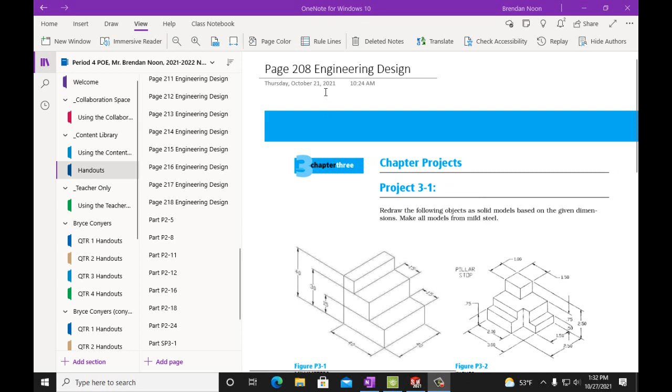All right, today we will be starting the projects in Chapter 3, page 208 of our Engineering Design and Graphics with SolidWorks 2016 workbook. There are 4 parts that we're going to be creating, and you could see that there's multiple ways that you could do these parts. All right, so figure

3-1, project 3-1, you could just draw this profile and just extrude it out 40 millimeters and be done with it. Or you can draw a square 40 by 40 and extrude it up 15 millimeters and then draw on that top plane. You could draw on the top surface plane, you can draw a 40 by 15 and have that extruded up, and then you could do 40 by 10 and extrude that up 10 millimeters.

So these, once again, you could just do a profile of this and extrude it across 20 millimeters, and then you can draw this little rectangle here and do a cut extrude through this little slot right here and be done with that one.

This one you could just simply do the profile, and then you could extrude it out 50 millimeters, and then you could do a little rectangle that's 15 by 20 millimeters here, and you could cut extrude through that a little bit, and then you could draw a square right here that's 20 by 20, and then you could cut extrude that and be done with that one.

This one is a little more complicated because you have these measurements. All right, so this side and this side are not the same dimensions. So we have, this is 0.75 and this is 0.5. This one is the reverse. This is 0.75 and then this is 0.5 inches. And then this is a 1 inch by 1 inch cut through here.

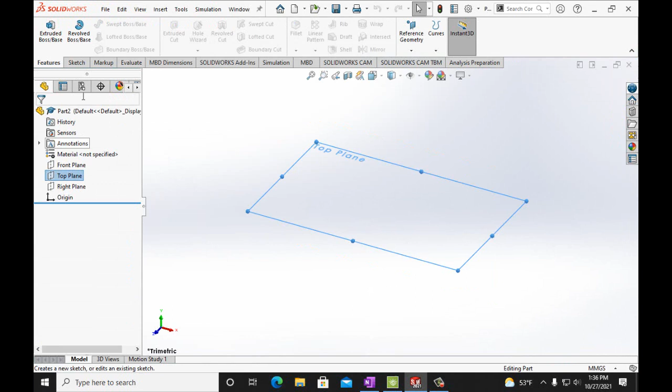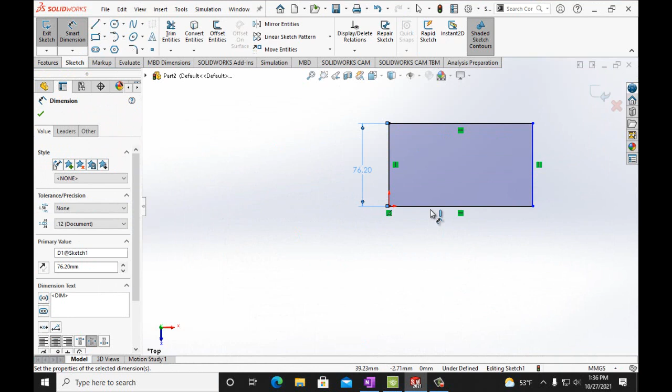I'm going to start on file, new, part, okay. And I'm going to do the top plane, and we'll do a sketch. I'm going to do a corner rectangle. And I'll start in origin, and I'll bring it out like this. And I want it to be 3 by 2.5 inches. So let's see what we got here. We got smart dimension 3 in by 2.5 in. All right, so you can see I default.

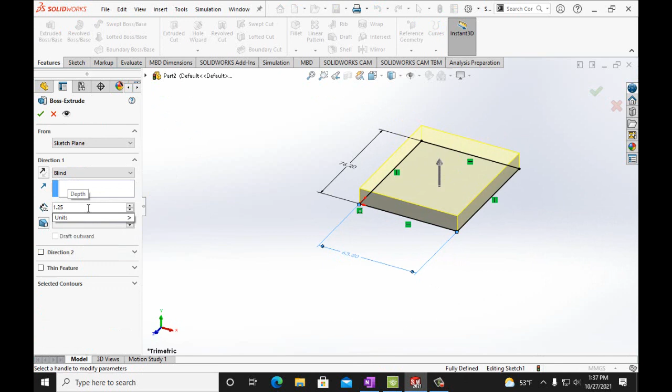This is in millimeters. So let me extrude this first. 0.75, so we got 1.25 inches. Extrude 1.25 inches. All right, so I have this. Now let's go into our tools, options, document properties, units. Let's put it in inches. So I have the correct numbers here.

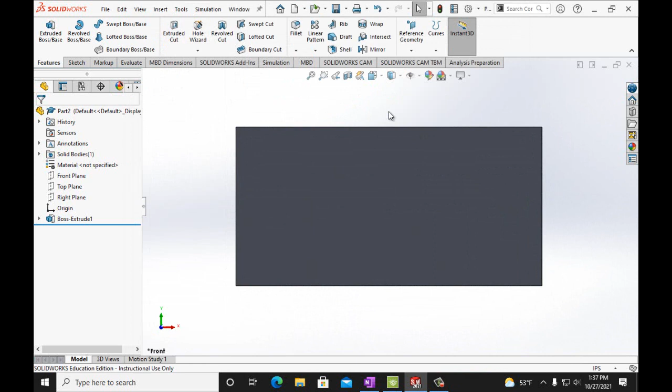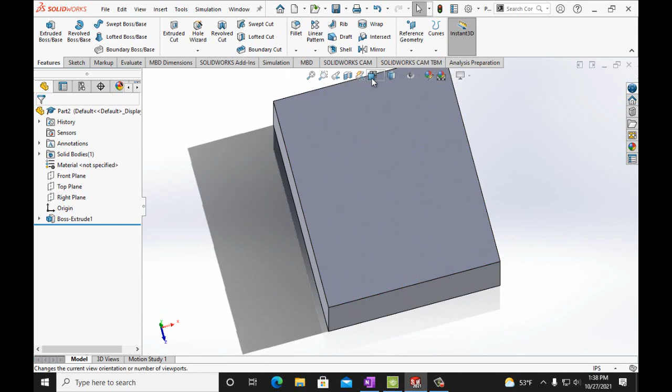All right, so I got this big block here, right? And I'm gonna tap this a little bit. Let's see, there's a front plane. I'm gonna tap this over, so I'm looking at it. So this is 3 inches. This is 2.5. Let's look at a top view. Top. Where are we at? This is top view right here. Top view. All right, so this is what we got.

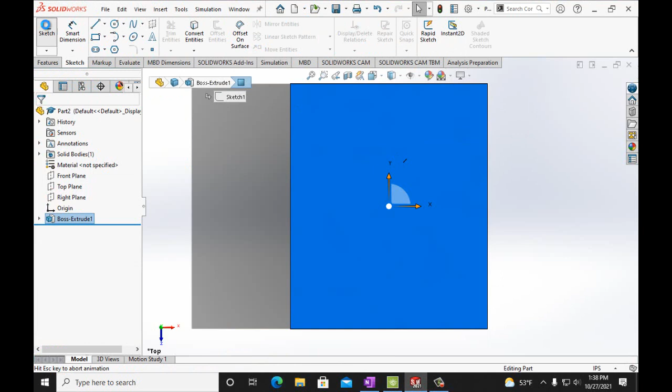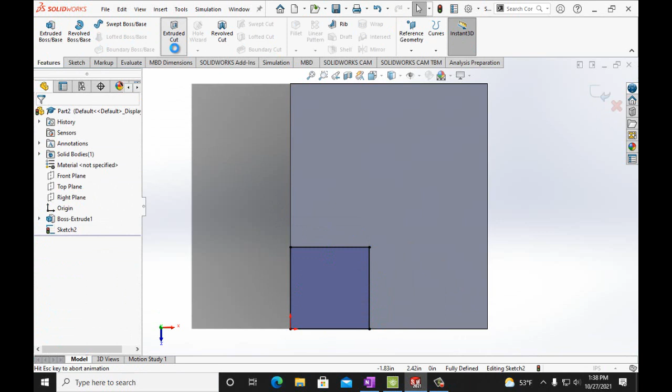All right, so this 2 and 3, that's 1 inch by 1 inch square. So let's go ahead and draw that and just cut it. I'm going to click on this top surface, hit sketch, hit my corner rectangle, pick this corner, and then I'm going to smart dimension this to be 1 in by 1 in. And then I'm going to go to features, extrude cut, and I'm going to do through all because I just want to get rid of it. All right, so that has this right here.

All right, so now this is 0.5 by 0.5. This is 0.75 by 0.5.

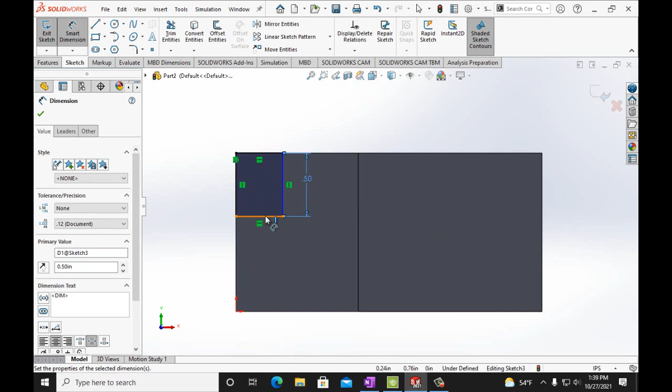All right, 0.5 by 0.5. All right, so let's do that square first. So I'm going to click on this surface. I'm going to hit sketch. I'm going to hit the rectangle tool. And I'm going to come over here, and I'm going to smart dimension this 0.5 IN by 0.5 IN. And then I'm going to do green check mark.

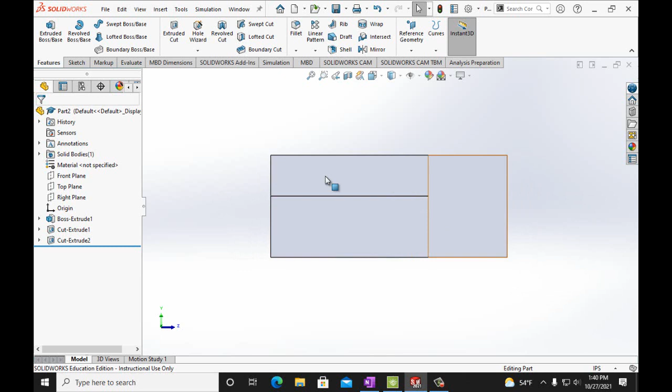I'm going to do an extrude cut. Again, I'm going to do through all. I'm going to hit OK. All right, so that's gone. Now I'm going to rotate this to this face. I'm going to click on this face, hit sketch, my corner rectangle. I'm going to go like this. And smart dimension, this is going to be 0.75, which is pretty close. I got 0.75 inches.

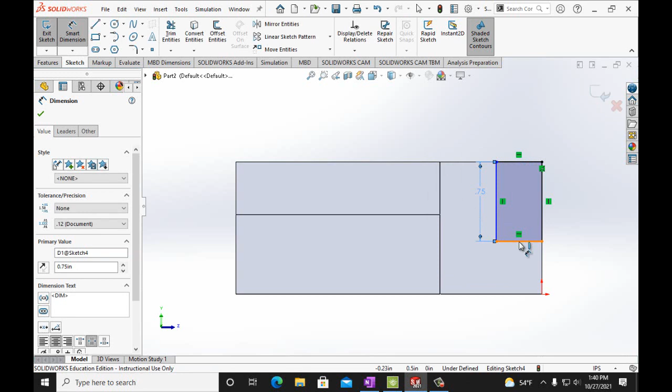And then this is going to be 0.5 inches. And then I'm going to green check mark, features, extrude cut, through all. All right. So now I got this going. Let's see what we got here. This is pretty easy. I got this whole level completed. And now I just have to do this rectangle on top. That is 1 inch by 1.5 inches.

And let's see, we got 1.25, 1.5. What is it? Oh, we'll do the thing from here to there to 2.5. So I'm just looking at the numbers, making sure I got all these numbers correct. All right, so let's do the math here. We got 2.5 from top to bottom. Or, yeah, that's fine. All right, we'll do the math in a second. So we got 1 by 1.5.

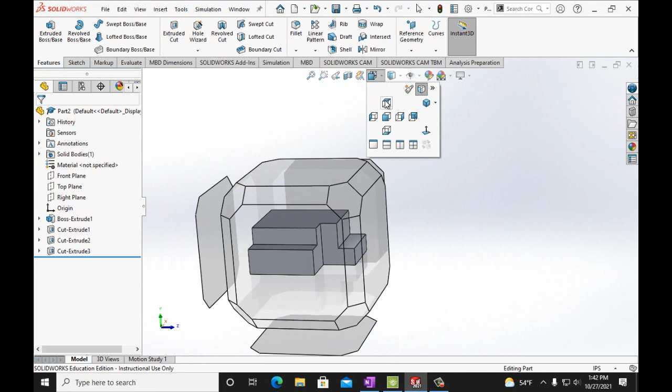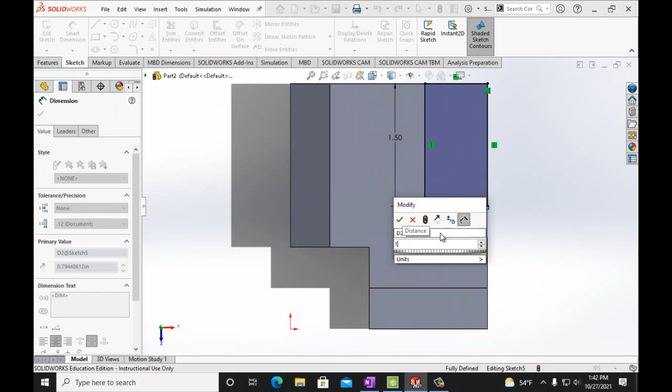So top view, click on the surface, sketch, rectangle, corner rectangle, 1 by 1.5. So smart dimension, this is 1.5 inches, and this is 1 inch. All right, and then we check mark, features, extrude. Turn it this way so I can see that.

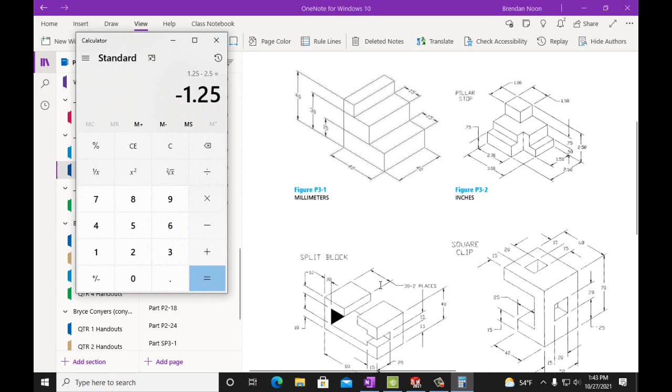All right, so 1.25 leaves 1.25. No, it doesn't really look like that. Something in my head's saying I'm messed up here, so I'm gonna get the old calculator out. So I have 0.75 plus 0.5 equals 1.25, minus 2.5 equals 1.25. Right? For some reason that doesn't look proportional, but 1.25 is what we have here. So let's come back here. What we want in here is 1.25 IN. Hit OK.

See, that's what I'm saying, that definitely does not have the same proportionality as this drawing right here. This is 0.5 from bottom to here. This is 0.75, and from the very bottom to the top is supposed to be 2.5. I think that's supposed to be 1.5. That doesn't make great sense either. This looks like it should just be 0.75. It's definitely proportional, these 0.75s. So let's just go back. I want it to look good. I don't want it to simply have the same dimensions. I want it to look like the drawing did, because there's probably an error there.

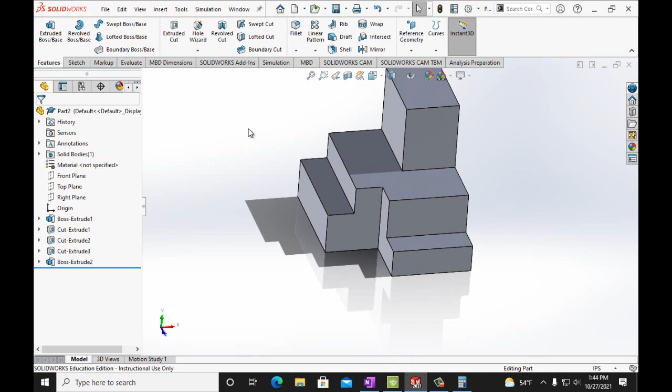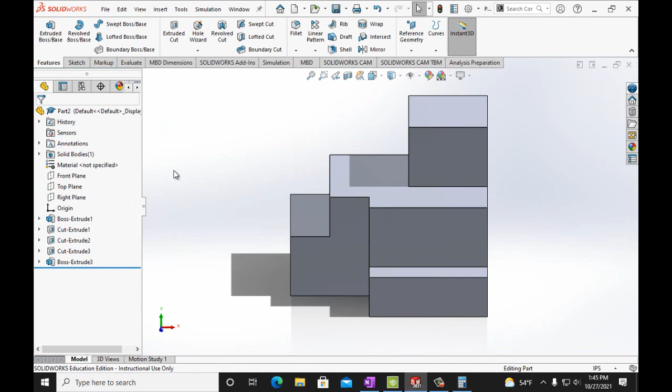So let me do edit, undo, and then let's do our features boss extrude, and then I'm going to put 0.75 IN. Hit OK. And let's look at it. Oh, let's look at that. All right. So I'm going to push the arrows around this way, this way, this way. All right. Zoom out a little bit.

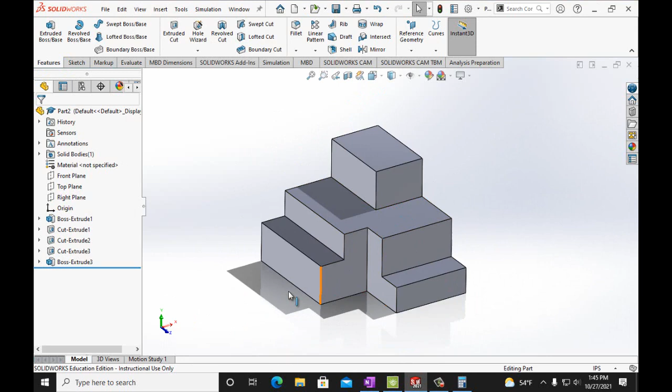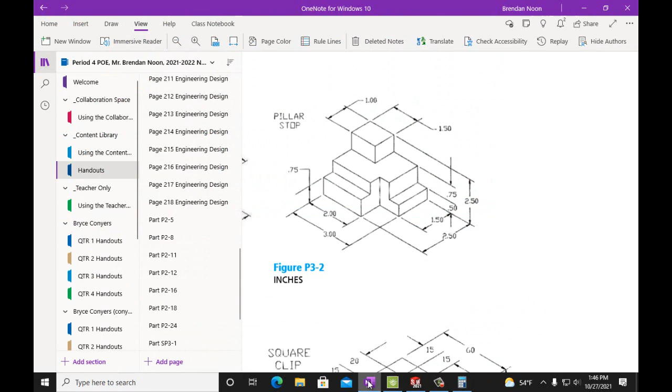Okay, I think I'm looking at this. That looks more proportional. This face and this face look about the same. So I think this 2.50 is an error, because obviously that didn't look like 1.25 up there. Everything else, look at it. There you go. That's it. Oops. So let's save it. File, save as. This is part 3-2. Part P3-2.

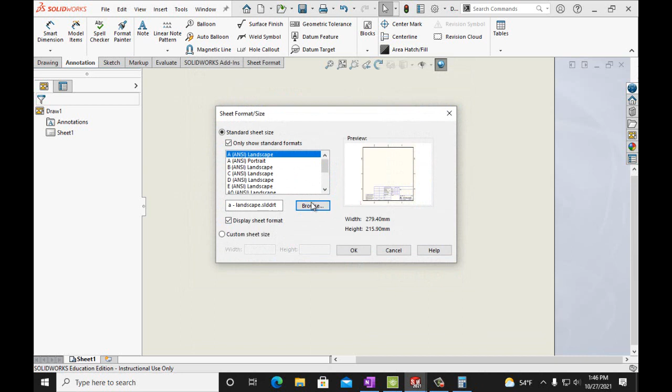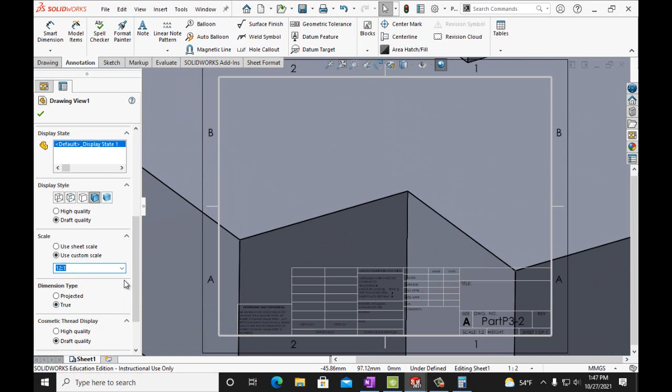And then we're going to make a drawing from the part. This one. Oh, I don't want that. Sorry. This one is what I want. I hit OK. And I like the current view that I put there. Like always, I like to use this in my drawings. And custom scale for this one because it looks kind of small. Let's see, 2:1 looks too big. So let's go to 1:1. That looks fine. There's a ton of things we can have up here. Ooh, look at that. Let's just go 1:1.

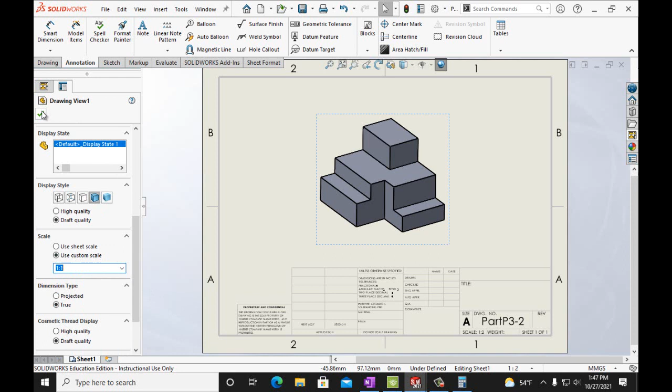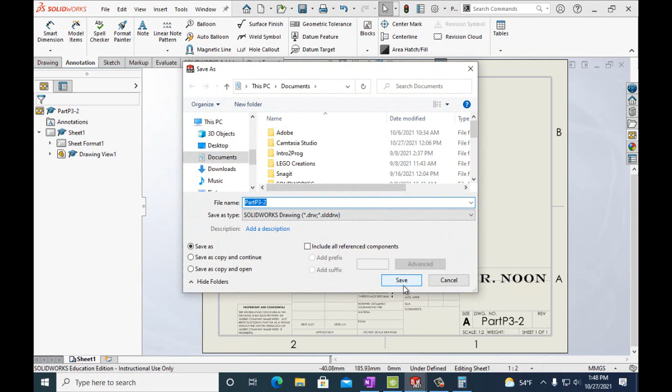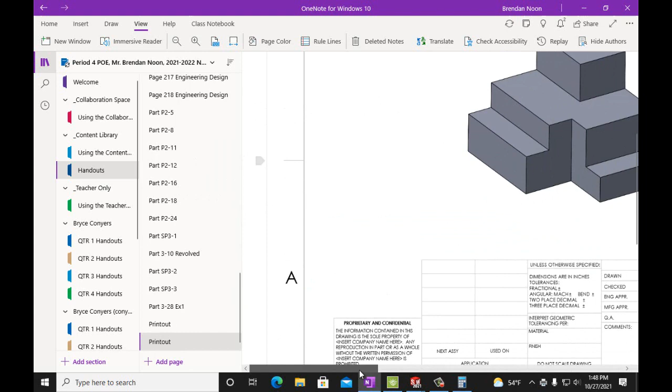And then that's okay. A note, we put our name, pick a font, pick a size, make it bold, type our name. Hit OK, and file save. Save. File, print. We want send to OneNote for Windows 10. Okay. Handouts. Okay. And here we have it. This is part 3-2.